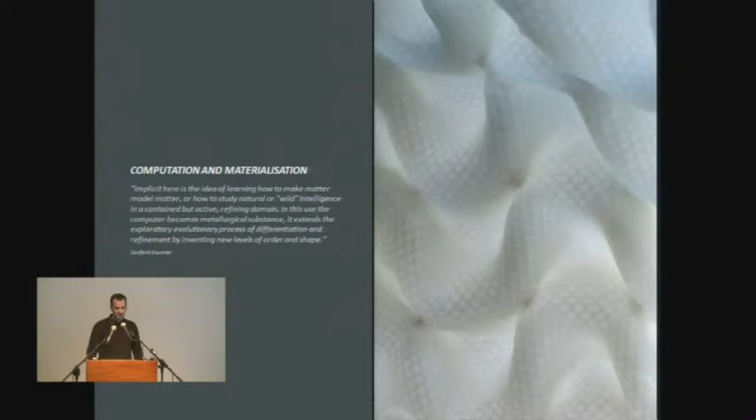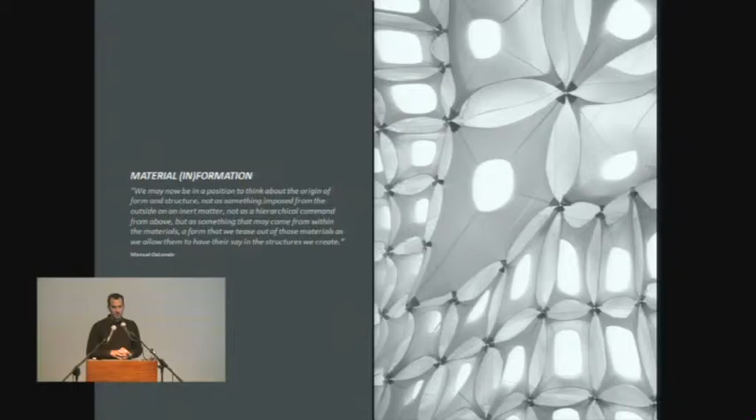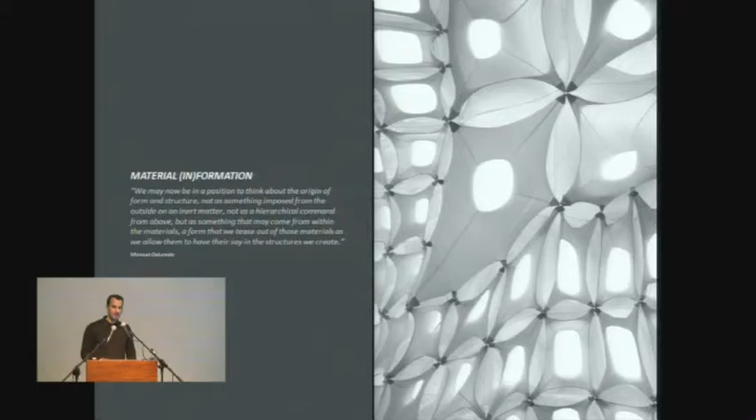Oh, sorry, just need to. They're not allowed to use those adapters anymore, so let's see which one are you. I already put it in. Done? Fantastic. Thank you. So ready.

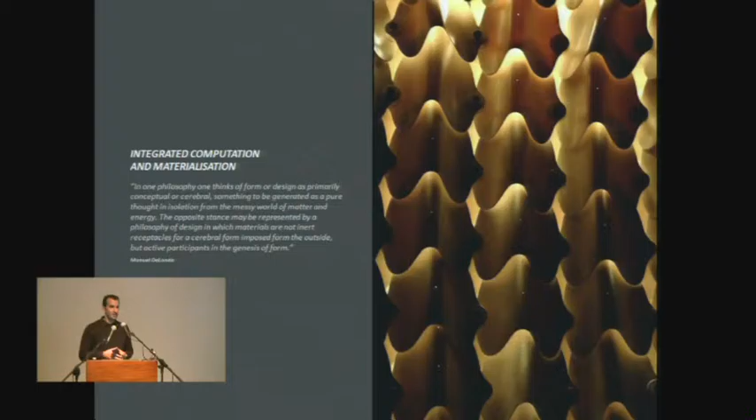And I think this is interesting because it opens up the possibility to no longer conceive of materials as passive receptors of a predetermined or pre-designed form, but rather as a generative participant in the design process. And this probably presents quite a radical departure from both, on the one hand, the tired modernist truth to materials, most infamously proclaimed by brick whisperer Louis Kahn, and the dismissal of materiality and materialization altogether, which is quite emblematic for the previous generation of digital architects.

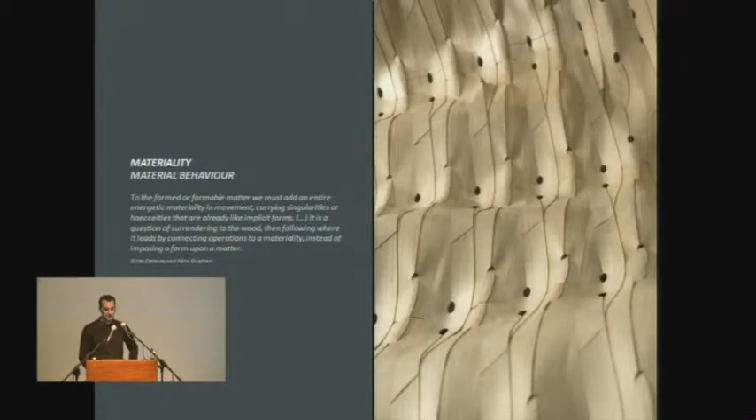So instead of that, our approach finds its conceptual roots in the processes of becoming in nature, which we call morphogenesis. So natural morphogenesis, as you probably all know, is the process of ontogenetic growth and evolutionary development that derives the complex organization, structure, and shape of natural systems from the interaction of, on the one hand, system-intrinsic material capacities, and on the other hand, the external influences, forces, and energies of the environment.

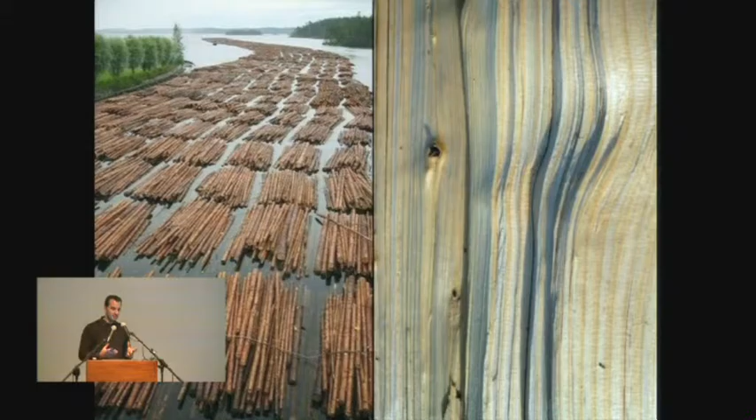And this leads to quite a profound difference between the fundamental characteristics of biological systems and the established logics of technology as they still very much pertain to architecture. So instead of an assembly of monofunctional, highly optimized individual parts made from a vast range of different materials, as in technology and architecture, biological systems really consist of very few components that are made from only a very small number of basic materials that achieve their outstanding functional integration, performative capacity, and material effectiveness through morphological differentiation, which is the summary process of each element's response and adaptation to its specific environment.

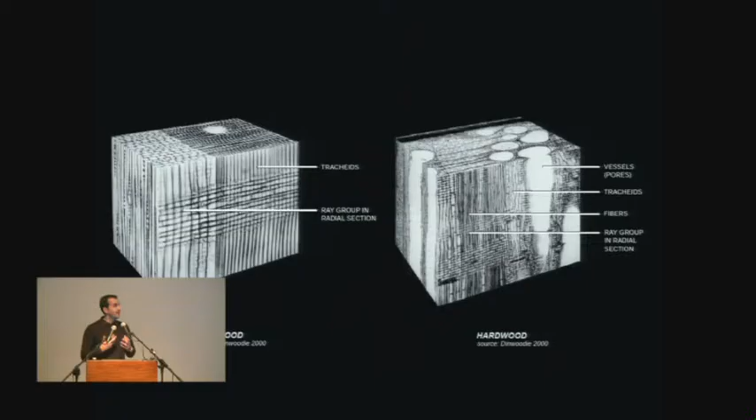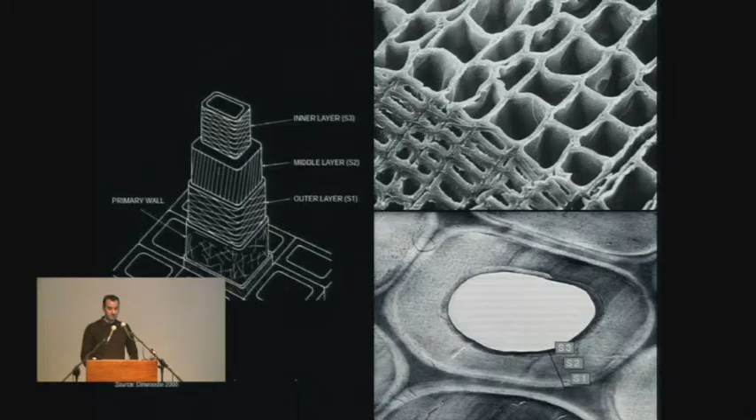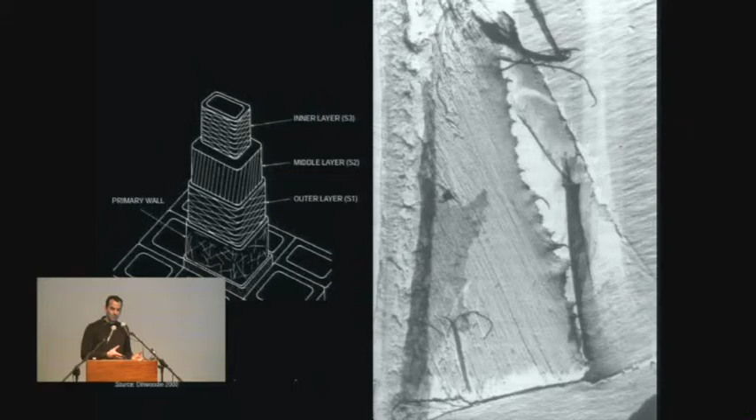Another really striking characteristic of natural morphogenesis is that obviously formation and materialization is always inherently and absolutely inseparably related. And this is quite in stark contrast to the usual way of thinking about architecture design, which is still characterized by a one-directional and hierarchical relationship that prioritizes the definition of form, structure, and space over its materialization. So I think one could argue that since the Renaissance, the rising separation between the processes of design and making have led to a conception of materialization as something that is more facilitative rather than generative in character, and of materiality, as previously mentioned, as a mere passive property of shape. And this is still very much the case today, maybe particularly since the advent of digital design.

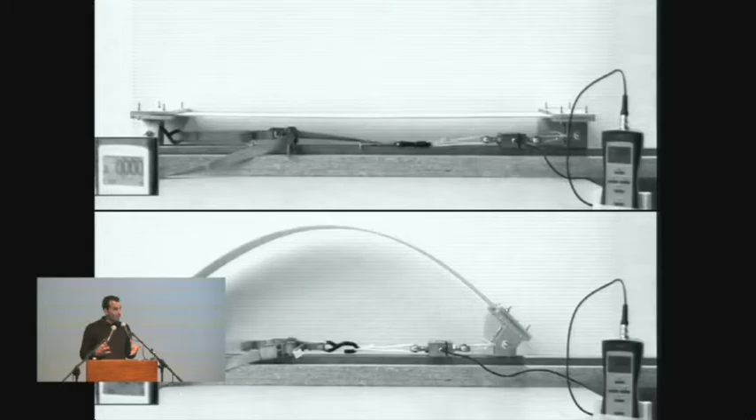So over the last 10 years, our research has focused on the development of a quite different, more integrative approach to design computation and digital fabrication, based on a multidisciplinary approach that entails working together with structural engineers, computer scientists, material scientists, and a lot with biologists. And it's really an approach where computation and materialization are conceptualized as something that is inherently and inseparably related. So as mentioned, what I will do in this presentation is go through 4 research areas that we are investigating, and rather than showing that on an abstract theoretical level, I will back this up with 4 related projects. So looking at materiality, materialization, material structure, and ultimately material performance.

So the first chapter really focuses on materiality and investigates how new technologies enable the integration of material behavior in the design process, and thus allow for this kind of understanding of material, not so much as something that is just there to receive a predetermined shape, but rather something that can become a generator in the design process.

I think it's also interesting to see that this approach is not limited to exotic building materials or expensive manufacturing processes, but that it can actually be employed in a context of very low resources, and it can even unfold new possibilities from very common materials, as is the case with wood, which is arguably one of the oldest construction materials we have.

But unfortunately, due to the demands of standardization that are superimposed on practice, it has really been dumbed down to mainly a dimensional construction element, which is probably most emblematic in the US, where you don't call it a piece of wood anymore, you just call it 2x2, 2x4, disregarding the fascinating internal cellular structure of wood, which actually is the driver for its behavioral characteristics.

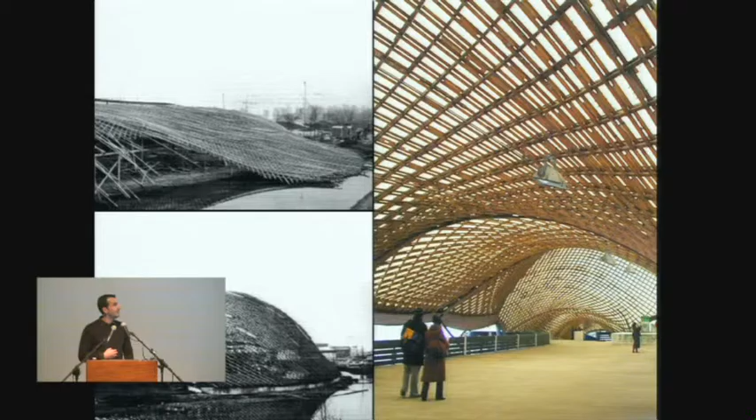So all our projects that look at this kind of integration of design computation and materialization really begin on the microscopic level, where we investigate the particularities of the material. And it's very interesting to see that on this level, wood can actually be described as a natural fiber composite material, where the cellulosic microfibrils function like fibers that are reinforced in a matrix of lignin and hemicellulose.

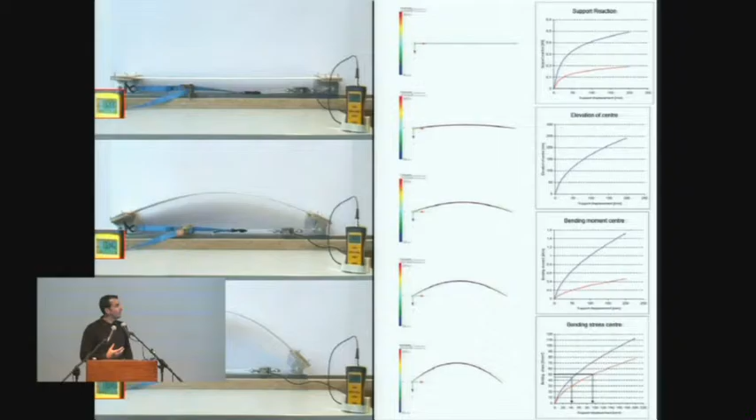And what is also interesting is that in this way, wood actually shares quite a lot of characteristics with what we know as synthetic composite materials, such as glass fiber, which are characterized by high strain at failure, which means they have relatively low stiffness combined with high structural capacity. And this is interesting because these material characteristics are well suited for construction techniques that employ the elasticity of wood to physically compute more complex shape.

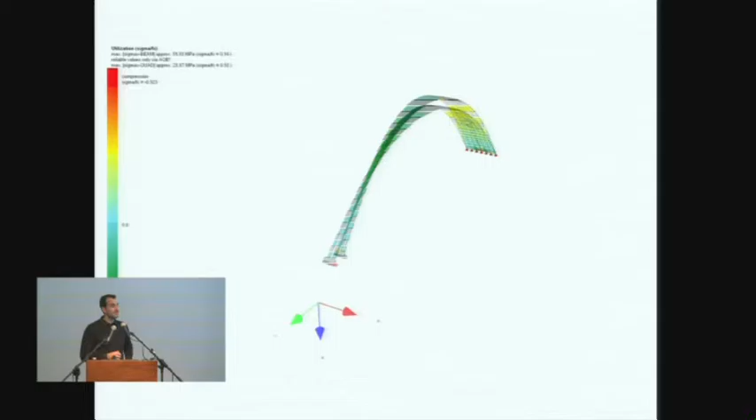And this was investigated in the first project I will show a little bit more in detail, which was a collaborative project of researchers and students from our institute and the Institute for Building Structures and Structural Design, run by Professor Knippers, who is a structural engineer. So this is also an example of how such a collaboration can work.

All the projects that I will show are typically one-year projects, so all the research, fabrication, execution and construction happens within the time frame of one year, and it's a collaborative effort between teaching and research, usually bringing together 5 or 6 PhD researchers and 10 to 15 graduate students.

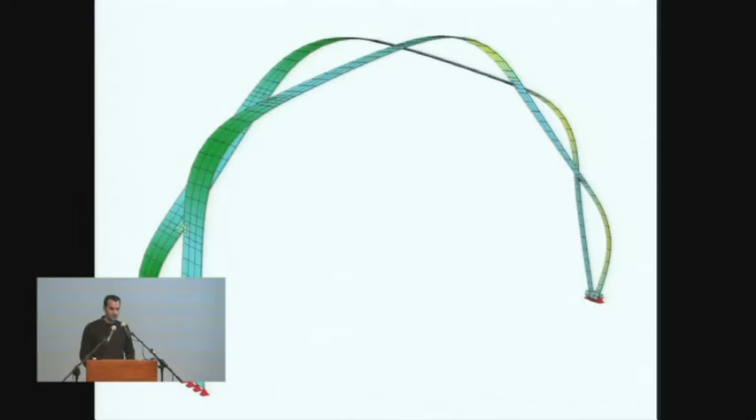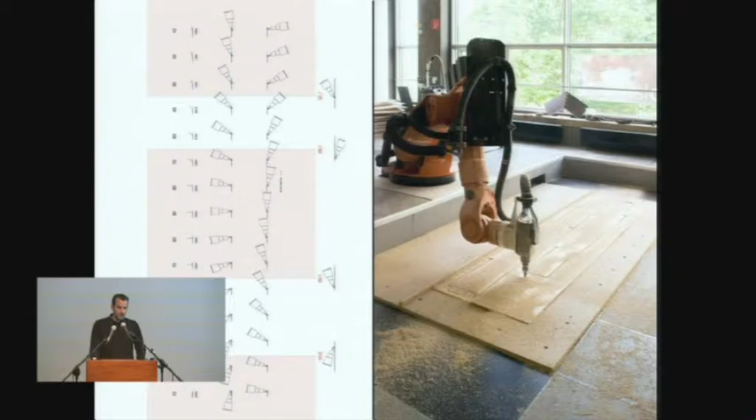So at the core of that project is really the awareness that any material has the ability to compute form. And a very good example of that, which you can see here, is the specific figure that a strip of plywood finds once you expose it to a very simple input. If you pull on the one support point, which is really just a linear translation based on a given force, you actually get the relatively complex Elastica curve for free. What's also interesting is that this so-called Elastica curve overlaps in certain geometric regions quite closely with the catenary curve.

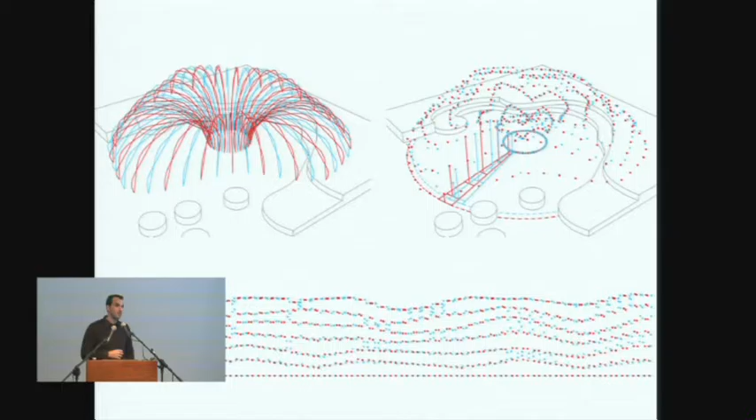Despite the fact that this is an interesting material behavior and allows you to actually shape simple pieces into complex geometry and that they can have a structural advantage, this behavior is hardly ever used in architectural design. And this is because architects can simply not draw or model such material behaviors, and that means that they can usually not design with it. You cannot draw an Elastica curve and then expect the material to do that. You have to have different techniques.

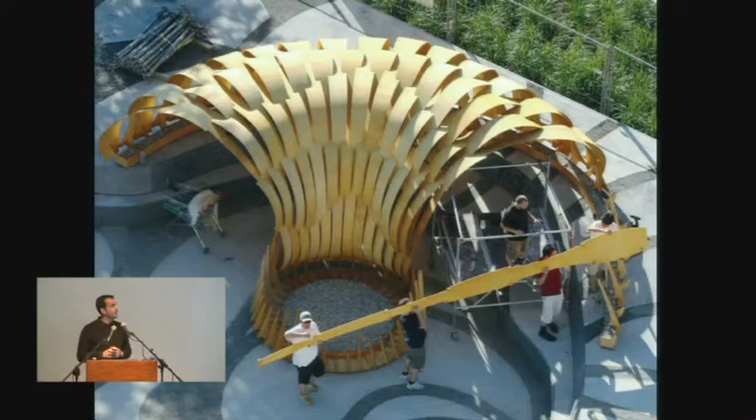So it doesn't come as a surprise that there are only very few examples of such elastically bent architectures, as for example the vernacular architectures of the Madan people in southern Iraq that construct their houses from elastically bent reed bundles, taking advantage of the pre-stress in the elastic bending process to stabilize the houses. Or, for example, the timber grid shells that were developed by Frei Otto in the 1970s at his institute in Stuttgart, that are initially assembled as entirely planar, regular wooden lattices.

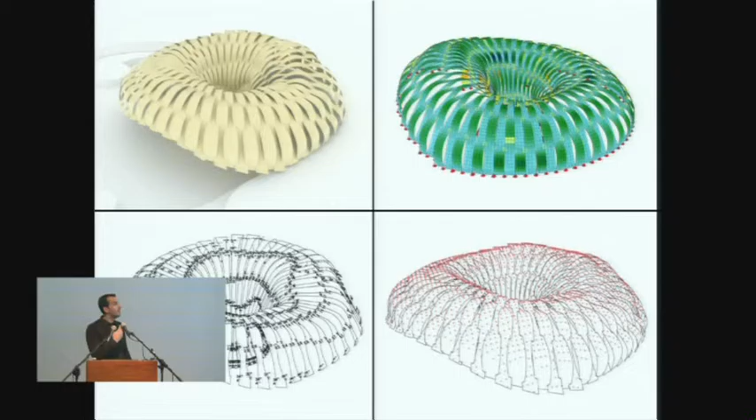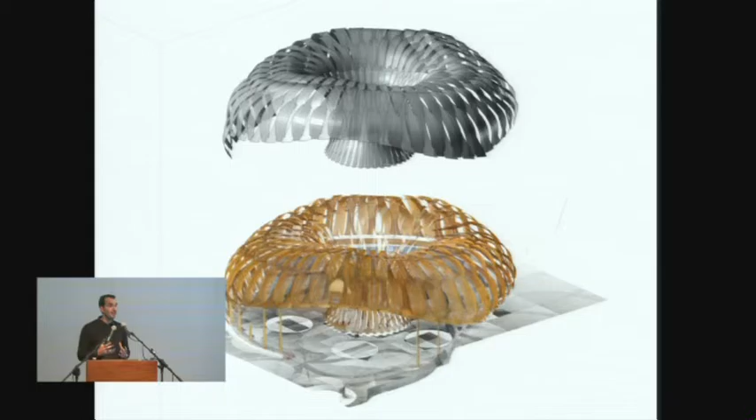This kind of calibration, creating an interface between the physical and the computational, allowed us to define a basic material system consisting of planar strips. As you can see in this simulation, it's a simple system where two strips are initially formed by a global bending induced by the translation of the support point, then connected at differential distances so that a tensile strip region holds the other elastically bent region in shape.

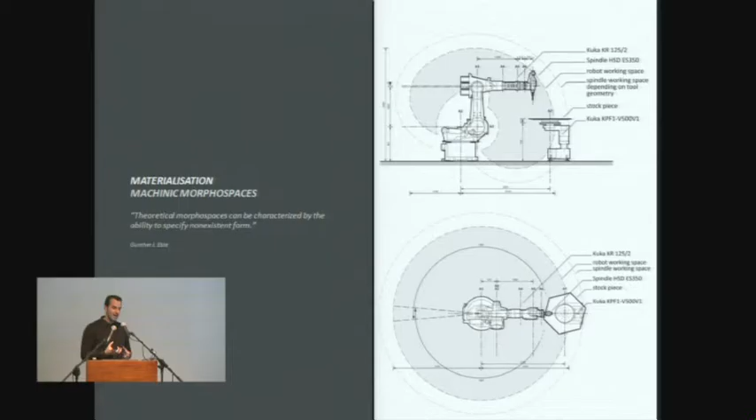So along the length of the strip, tensile and elastically bent regions alternate and keep each other in equilibrium. This is what we call a behavioral system, which then needs to be transferred into a construction system, done here in a fully computational manner, exploiting the possibilities of the machine to be used. In this case, the ambition was to do the entire project with one machine and one tool only.

It's not difficult to detect that there's one critical detail in this construction, a detail that most structural engineers would initially say is not working. This is the joint point of the two strips, where the structural depth is reduced to almost zero, which obviously induces a severe weak point in the structure.

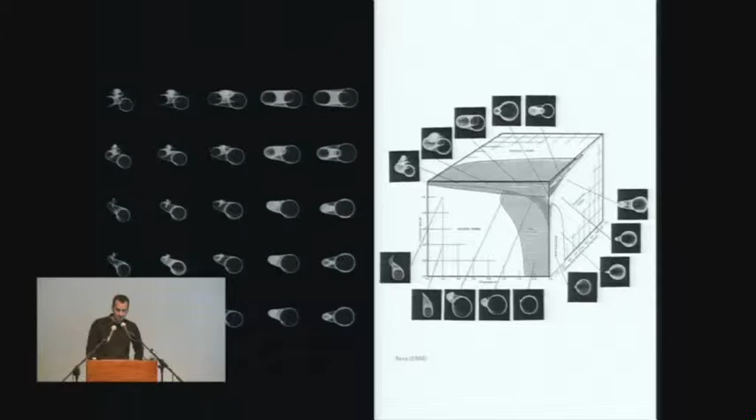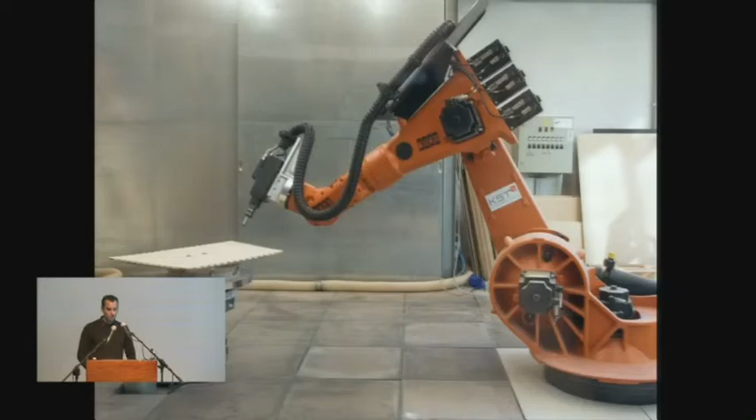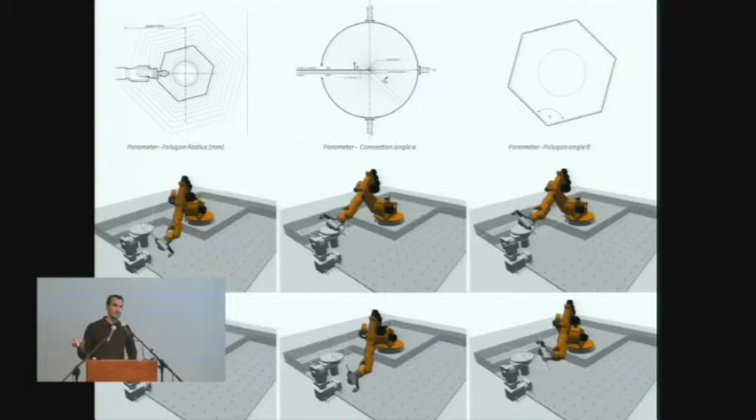Of course, this structurally required irregularity results in more than 500 geometrically different parts, which isn't a big deal when you can use digital manufacturing processes with a relatively streamlined connection between the design model and the fabrication. What's probably more interesting, and I think quite fascinating, is that the substantial intellectual investment in developing the design, design computation, and simulation processes results in a surprisingly simple and cheap system.

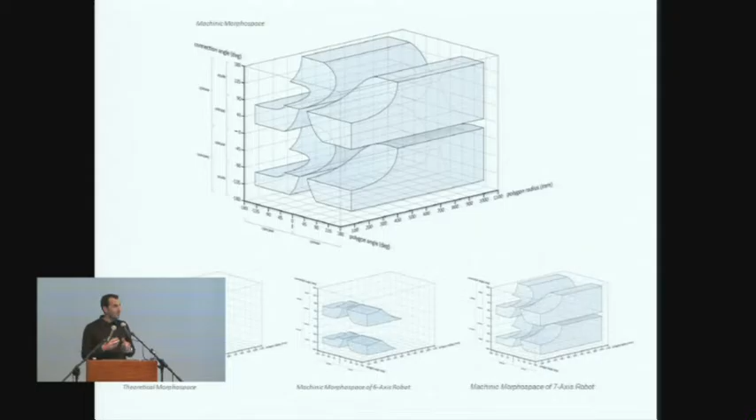Here, these planar strips just need to be connected at the joint points, and then they find the shape they need to take completely by themselves. So in other words, even in full scale on site, the material itself computes the shape of the pavilion.

This equilibrium state of the final pavilion unfolds, on one hand, quite a unique architectural space with a very specific architectural performativity, but at the same time it's also very efficient with the employed material resources and has a high level of structural performance. In fact, the entire structure, with a diameter of more than 12 meters, could be constructed using just very thin, 6.5 millimeter — about a quarter inch — birch plywood pieces.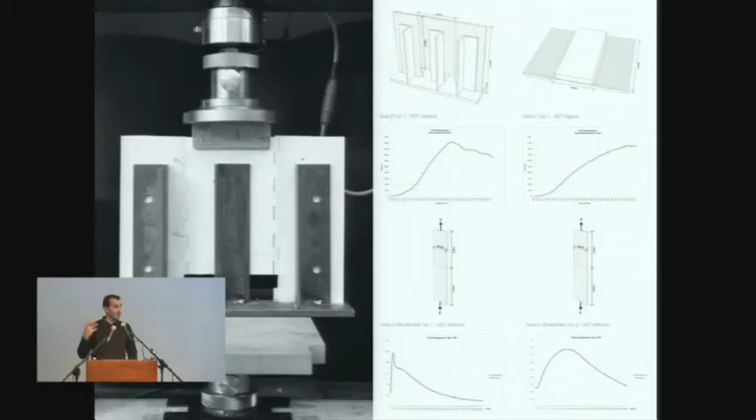This super thin skin is at the same time the load-bearing structure, which in all these cases also has to fulfill the quite stringent requirements of a German building application we have to get for all these prototypes, both in regards to wind loads and snow loads. But this skin is also the light-modulating and weather-protecting envelope, which in this case touches the ground only on one half of the toroidal shape and then forms an 8-meter free-spanning opening on the other side.

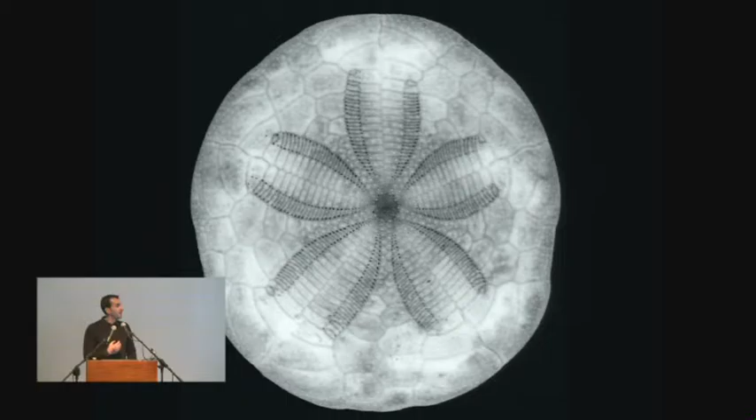What's also interesting is that inside this toroidal space can never be perceived in its entirety, which leads to a surprising spatial depth that is further enhanced by the sequence of direct and indirect illumination resulting from these undulations of the envelope.

In addition to using these projects as a kind of architectural exploration, we also use them as a means of investigating and verifying our design methods.

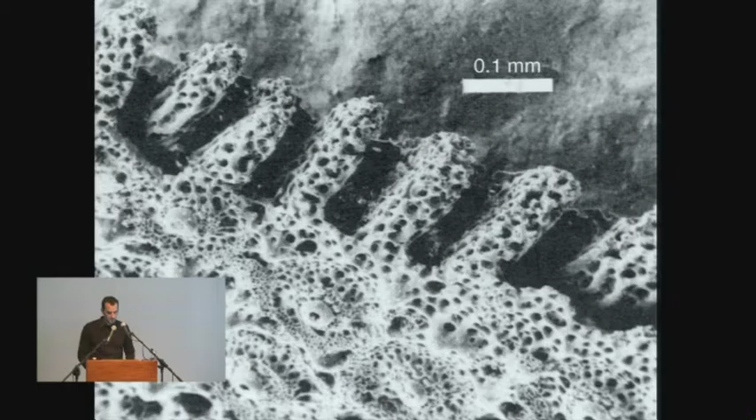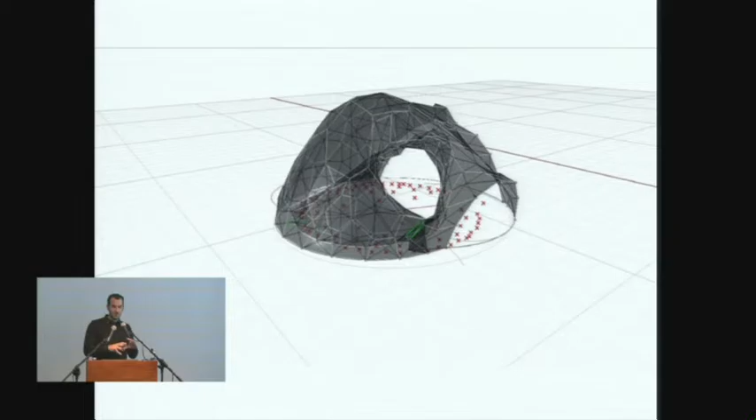And then the fabrication model, and most importantly, on the bottom right, a scan of the actual pavilion, which was done a couple of times, and then the resultant point clouds were algorithmically evaluated by overlaying the critical joint points of the scan with the actual location of the joint points as planned in the digital model.

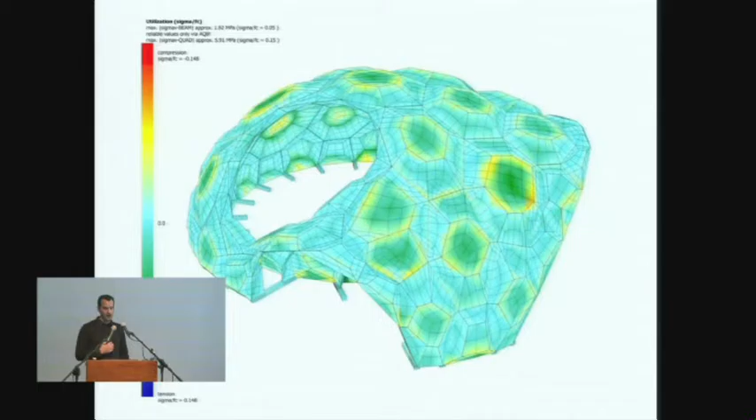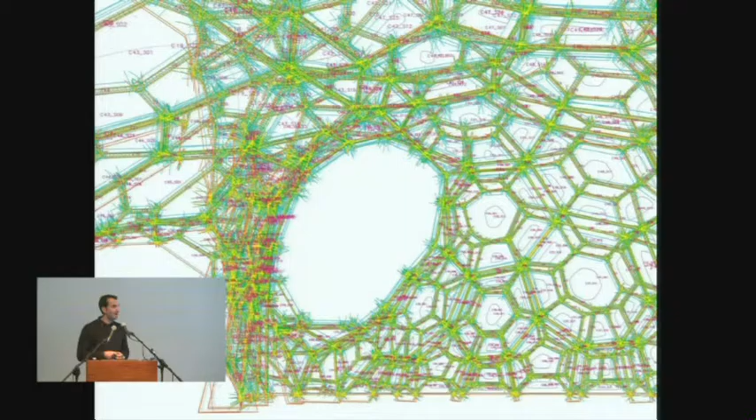So probably more importantly, I think the project also demonstrates how focusing the computation design process on material behavior rather than geometric shape allows for unfolding performative capacity and material resourcefulness, while at the same time expanding the design space towards formerly unexplored architectural possibilities. I think here one can really say that the material is no longer a passive receptor of a design shape, but really an active generator of the design.

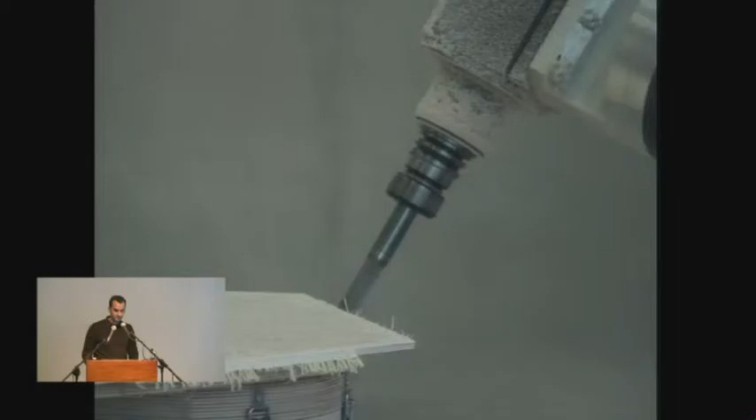In addition to these investigations of how one can actively employ material behavior in the design process, we also investigate how we can use digital fabrication not so much as a means of facilitating a preconceived design idea, but rather also to become a driver in the design process. For that, it's very important that one can find a way of capturing the actual capacities, or let's say possibilities, of these machines in a rigorous and systematic fashion.

And for that, we have investigated a possible transfer of the mathematical concept of so-called morphospaces from theoretical morphology in biology to computation design and fabrication.

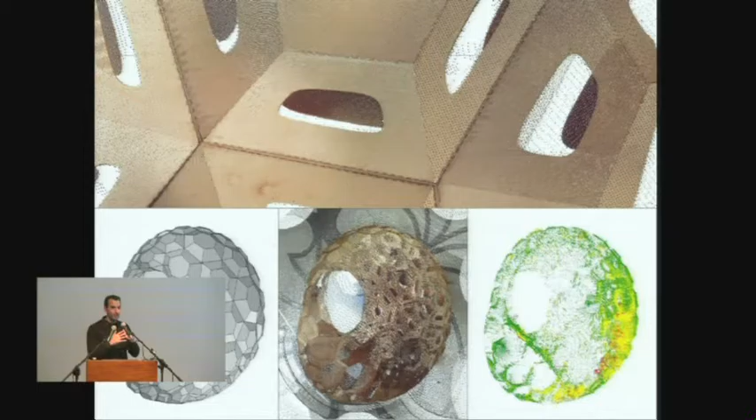But then the seminal moment is when he goes on and maps these parameters into a three-dimensional coordinate system in which each axis represents one of the shape parameters. This space that he opens up is the theoretical morphospace that all shell morphologies could take. And then he went on and mapped into this theoretically possible geometry space the actual shell morphologies as they exist in nature.

By that, he made the critical distinction between what is theoretically possible and what physically exists in nature, basically differentiating between the theoretical morphospace and what is called the empirical morphospace. So this was 1960s state of research in biology.

By now, theoretical morphology has moved on and uses n-dimensional models capable of mathematically describing a not-yet-existent form. So in the next project, which was again a collaborative undertaking of researchers and students from my institute, the Institute of Jan Knippers, and also other partners from the University of Tübingen, part of our competence network biomimetics, we investigated how we can transfer this idea of morphospaces from theoretical morphology to digital fabrication.

This project started with a basic investigation into how we can extend or use a production robot to expand the possibilities of traditional wood jointing techniques. In this case, finger joints, using a 7-axis setup that allows you to create more complex plate morphologies joined at various angles, while still maintaining the key advantage of the traditional finger joint—no additional mechanical fasteners or adhesives required for structural capability.

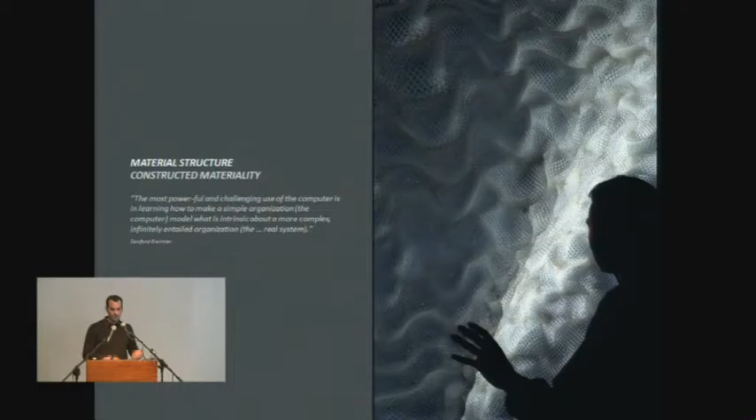This brings us to the quote from Julian Vincent, who stated that in biology, material is expensive but shape is cheap. As of today, the opposite was true for technology. Arguably, with these robotic fabrication technologies at hand, and knowing quite specifically how to navigate this space, you can change this paradigm and seek new performance capacities through adaptation of shape rather than adding surplus material.

For that, you have to understand the specific behavior of these plate morphologies. You don't need to be a professor in structural engineering to understand that these finger joints are very good at withstanding shear forces along the edges of the plates, but weak in withstanding bending forces, and have no capacity to withstand tensile forces. This poses a challenge if you want to construct a larger plate morphology or structure at a construction scale.

It's interesting to note that natural systems have evolved solutions to exactly this challenge—for example, the plate skeleton of the sand dollar, which consists of discrete polygonal plates jointed together by the biological equivalent of a finger joint. The sand dollar has evolved plate morphologies capable of capitalizing on this joint's capacity by transferring all forces acting on them—and they're quite enormous since they live on the shore face—into shear forces along the edges.

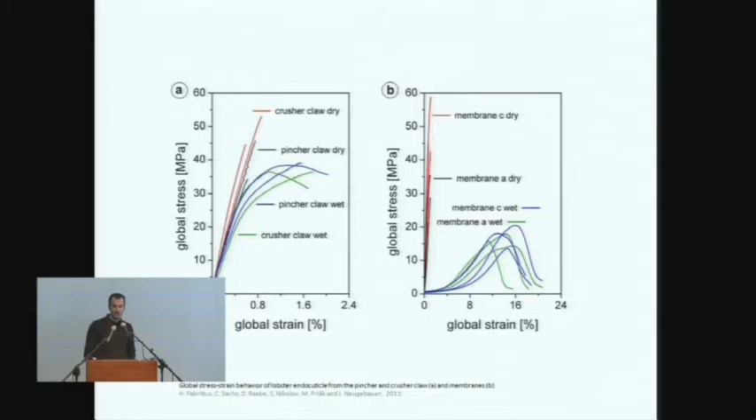So we investigated these sand dollars with the help of biologists, experts in biomechanics from the University of Tübingen. With them, we identified 8 relevant biomimetic design principles that govern this performance capacity, and captured them in algorithmic design rules embedded in a computational process. This enables the designer to explore the machinic morphospace of what is physically producible, while also capturing these biomimetic rules and still leaving enough design freedom to make a highly specific structure in regards to its context.

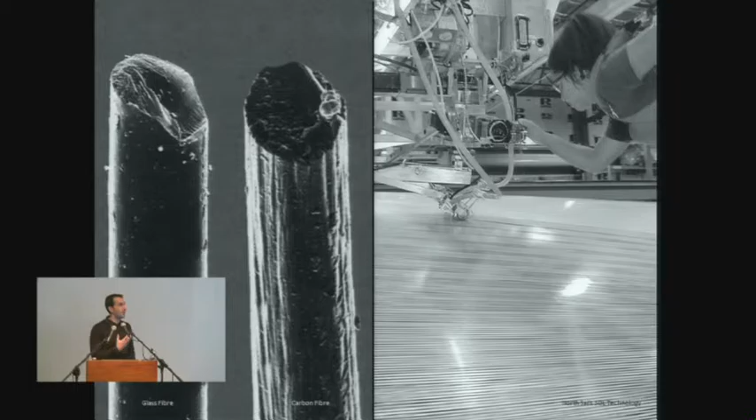The resultant morphological differentiation leads to high structural performance and a quite distinctive architectural appearance. But in return, it also requires the fabrication of a vast number of different plates—in this case, more than 850 plates with more than 100,000 different finger joints.

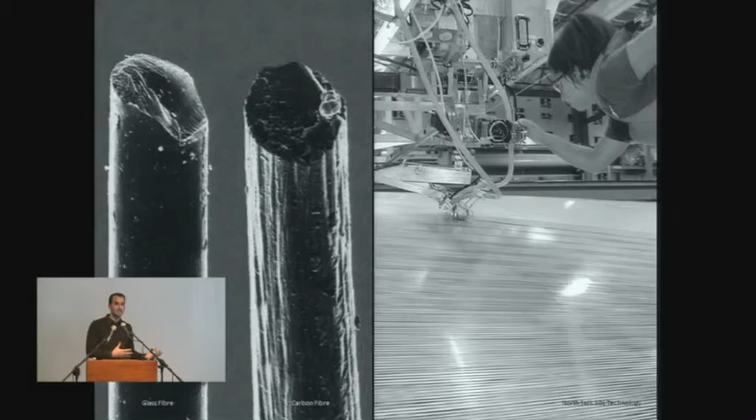So the plate is actually mounted onto a turntable that's also robotically controlled. And then it's actually trimmed, which has been done before the video started. And now the robot adds a miter at the edges, and then it cuts the joint in one go, for which we had a special tool developed by one of the industry partners, which is able to cut at the tip and the flange, which is quite unusual, which then means that the precision of the joint is actually the precision of the tool, which is in the tenths of a millimeter range.

It takes about 3 minutes to produce one of these plates. And what is interesting again is that while the design process is quite involving and a substantial intellectual investment, the resulting system is incredibly simple. It's basically a big puzzle that is self-correcting when it's assembled. It really does only fit in one quite precise shape.

Actually so precise that we did some unorthodox exercise when assembling it; this is the way you would never assemble a shell in construction. You'd always have scaffolds, then lay the segments on top, then do your tolerance compensation. If you do it like this and your last piece doesn't fit, there's no way of resolving this situation.

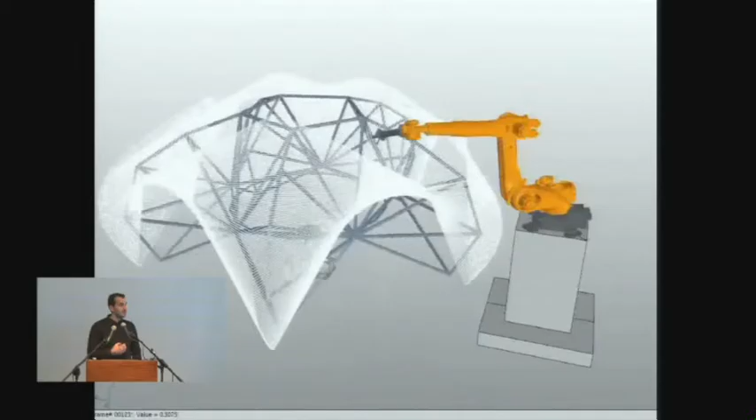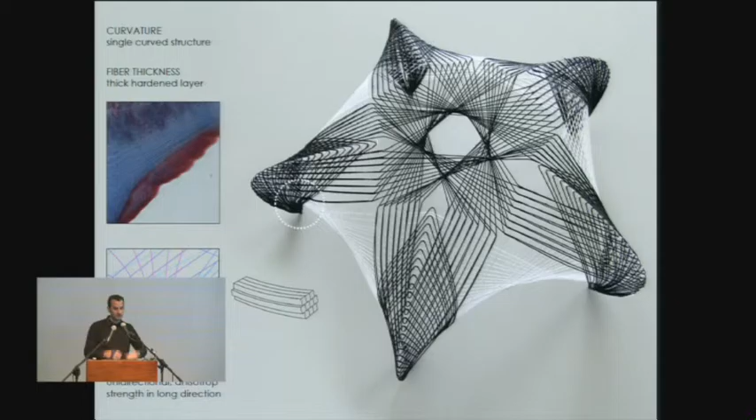More importantly, I think the resultant lightweight modular wood shell again demonstrates both the structural capacity and the architectural potential of such a system that exclusively consists of extremely thin birch plywood plates that are only connected by these robotically fabricated finger joints.

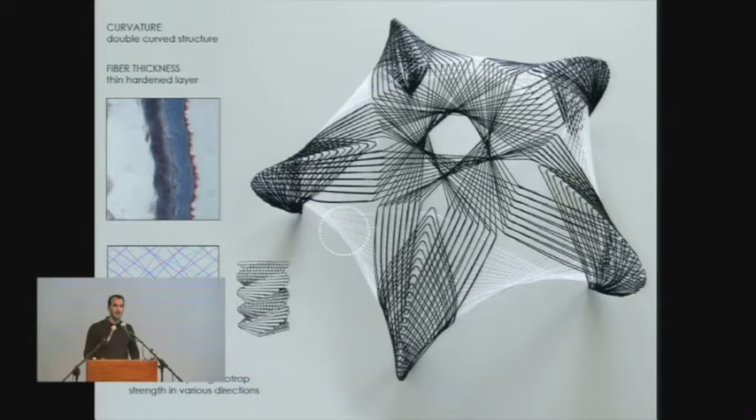And as the structural performance here results from each element's highly specific response, the entire pavilion with a diameter of more than 12 meters and a height of more than 6 meters could be built using only extremely thin plates. So in fact, all of the plates in this pavilion have only a thickness of 6.5 millimeters, which results in a very lightweight and materially efficient structure that manages to enclose 200 cubic meters of space with less than 2 cubic meters of wood.

So basically, you could build the entire thing with a stack of wood on that table that would be only that high. So envision what 2 cubic meters of wood are. It's actually really very little.

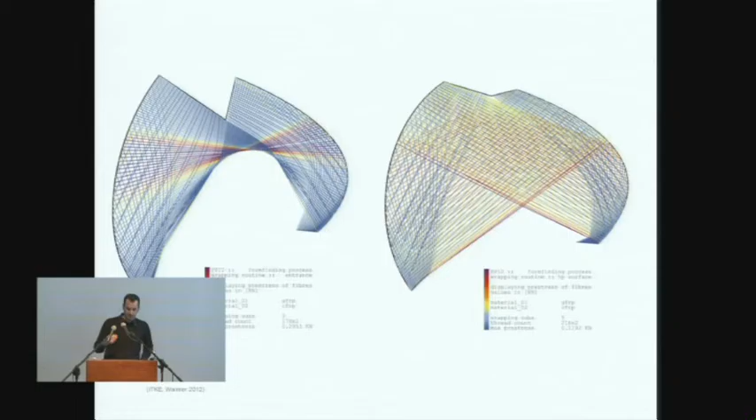So I think, in a way, this prototype shows how a tectonic richness and a structural capacity don't necessarily need to be in opposition to each other, which is a perception one could have by looking at a lot of contemporary architecture, but that you can actually fuse this possibility for architectural performativity and material performance in a material-oriented design process.

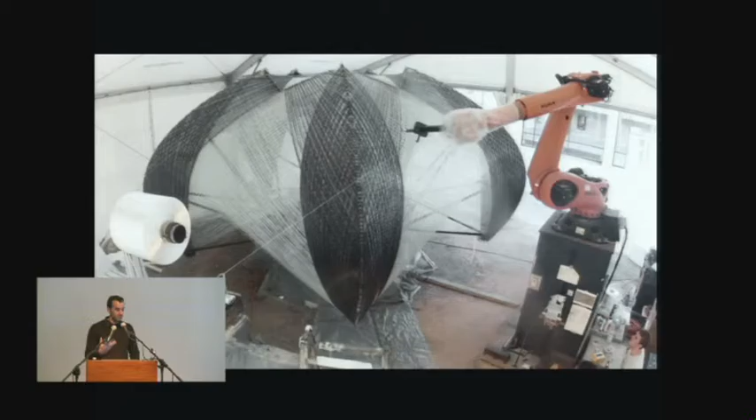So overall, I think the project quite nicely shows how embedding the logics of materialization in such a morphogenetic computational design process really also allows the designer to offset the conventional economics of construction. Here, as mentioned before, a substantial intellectual investment in the design process results in a very simple, cheap, and efficient system that still yields a lot of novel architectural possibilities.

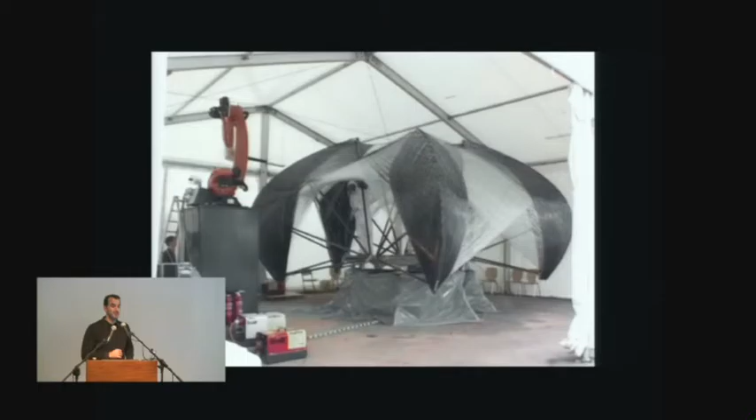What is interesting about this system is that it also captured the imagination of the Ministry of Forestry in Germany, and we actually got funding to build a much larger, permanent wooden shell as a result of this project, which will complete in April next year. I think it is interesting that these projects don't only allow architectural speculation, but they can also become instigators for actually permanent architecture.

It's also interesting to note that this morphology of the sand dollar with these discrete building parts is actually very rare in nature, and that you usually find exactly the opposite, which are structures that are very continuous and that are performative due to the local differentiation of one continuous material structure. So the third chapter focuses on that, how you can begin to think about material structure as something that cannot be so easily distinguished any longer, and with that you obviously shift towards a paradigm of composite construction.

So this is what we explored in the third project I would like to show you, which is really different to the previous pavilion or the previous project, which was a shell that was built up from discrete elements. In this project, we really aim for almost the opposite approach of an entirely continuous shell in which the material structure is constructed and differentiated in its continuity through robotic fabrication.

This is again a collaborative project between architects, structural engineers, biologists, and actually process engineers in this case. And it's interesting to note that there are a lot of biological examples that are like this, but we chose the American lobster because there's a lot of biological research on this one. So the exoskeleton of this lobster, which at first glance appears relatively monolithic, reveals under the microscope a high level of differentiation of the structure, which is organized across several levels of hierarchy.

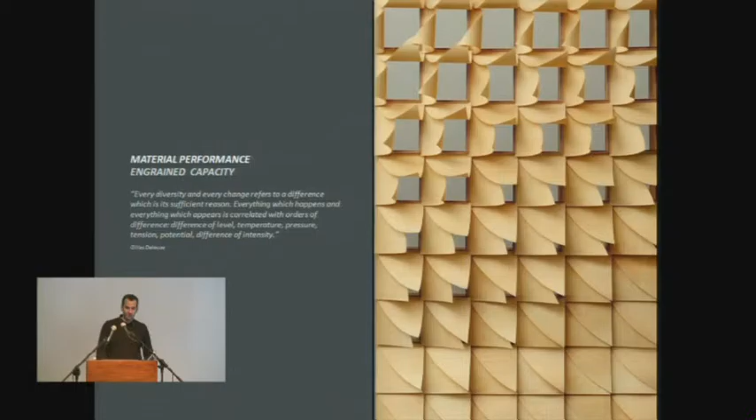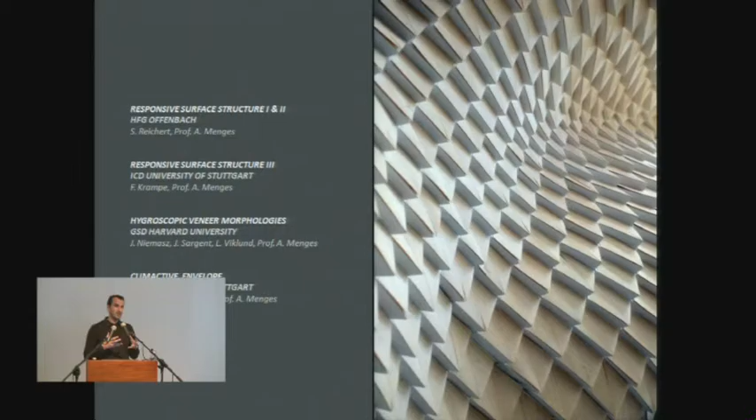And because these natural fiber composite materials are conceptually quite close to synthetic composite materials, we at the same time investigated new or advanced ways of working with, for example, glass fiber or carbon fiber composite materials. As for example, the 3DL technology, which is not that new anymore, I think it's 10 or 12 years old, where high performance sails for America's Cup yachts are actually produced in a way that the fibers or the filaments are laid according to the force flow, and these kind of fiber layup processes allow you to orient every single fiber in a direction in which it will ultimately receive the maximum stress.

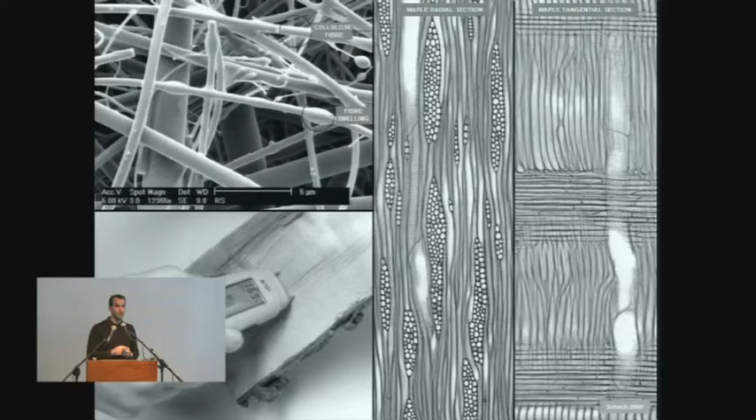Obviously, it also becomes clear that this is not a viable construction technology for architecture, because all these fiber layup systems require a comprehensive mold, which means that if you want to build something, you first have to build the building as a mold, and then you lay the fibers on top. So what we did is we tried to investigate possibilities of reducing the molds to a minimum linear scaffold on which an initial fiber layer is laid, which becomes the lost or embedded mold for the actual structural carbon fiber.

So here you can see this robotic process, which is a kind of 1 to 5 scale prototype, where the glass fiber surfaces are laid initially, and then they turn into the scaffold which ultimately receives the carbon fibers. So having established the basic robot programming logics, which in this case is not trivial because you don't program a machine path according to the geometry that the building element has, but according to a path that the tool needs to take in order to pre-stress the fibers in the right way. It's conceptually very different to the milling process that we showed before.

But once you have mastered this kind of robotic filament winding process, you can begin to investigate what different material behaviors you can actually yield from this process. So we did a lot of samples and evaluated them in collaboration with the structural engineers at the ITKE. And based on these different properties or material characteristics that you can get, and the logic and constraints of the fabrication process,

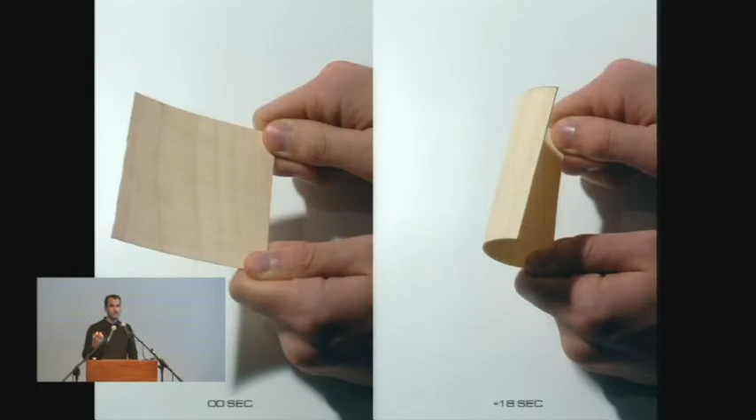So obviously, here design is very much related to the fabrication process. So we developed a kind of design syntax that allows one to explore the possibilities of this fabrication process, which is not trivial in this case, because the final geometry is something that only gradually emerges in the production process, because you have a lot of fiber-fiber interactions. So you lay your first fiber surface, and then the next fiber surface changes the geometry of that. And this happens until the last fiber is laid, which means that you have to simulate the fiber layup process for the entire fabrication.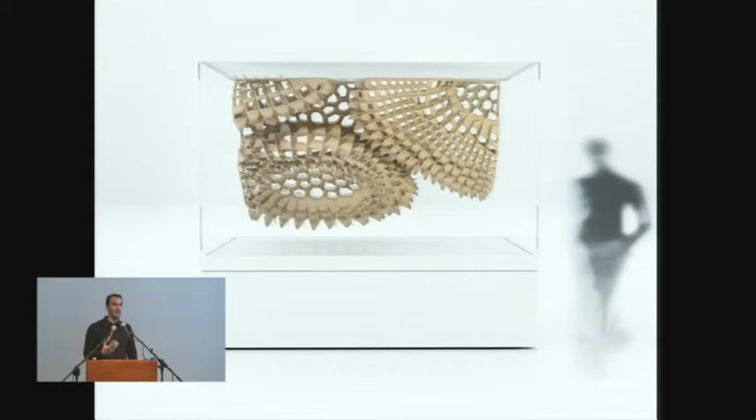So the final pavilion consists of more than 45 miles of robotically laid carbon and glass fiber, but it's only approximately 4 millimeters thin at its thickest part. So it is extremely lightweight and enables quite an amazing level of transparency and intricacy of the resulting surfaces, particularly when you see it from the inside.

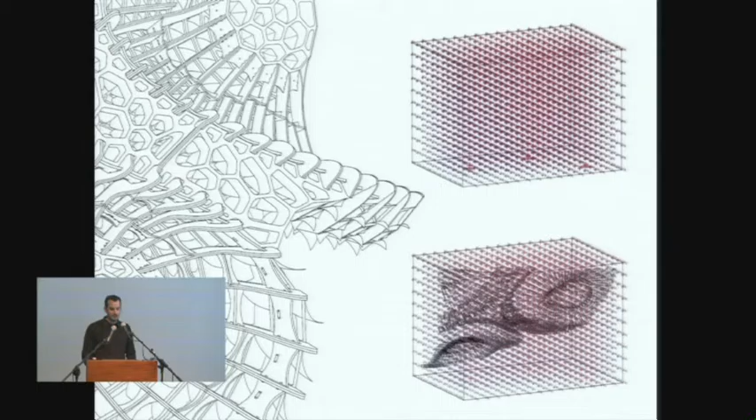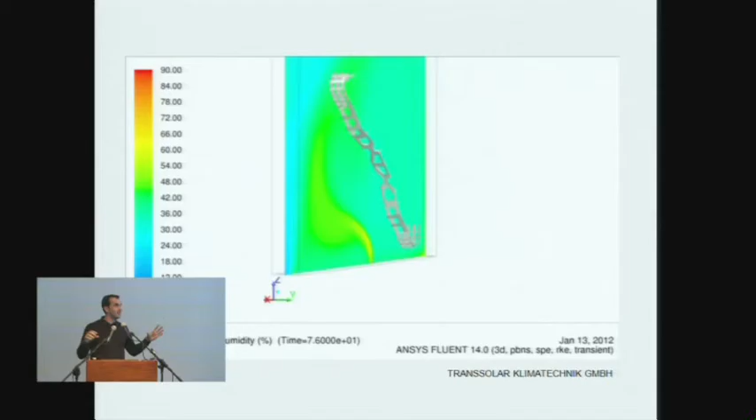So in a way, synthesizing the capability of the machine with building up the structure itself, the transparent glass fiber surfaces and the black carbon fiber rovings really allow perceiving the logic of the differentiated fiber organization within this translucent envelope, all forming one continuously constructed materiality. There's not a single additional element here. No nuts, no bolts, no nothing. It's just glass and carbon fiber rovings.

So I think, again, here the construction logic establishes both a super thin, highly performative skin and quite a novel repertoire for architectural tectonics, which in many ways allows to overcome the exuberance that is so emblematic for many digital designs. Here, the synthesis of novel modes of computational design, robotic fabrication, and also structural simulation enables the exploration of a new repertoire of architectural possibilities while still being very, very efficient with the employed material resources.

Currently, we're working on the next carbon fiber project, which is not completed yet, which actually takes this concept further by looking at a modular system that one can also wind with 2 robots without any scaffold in between. That's what I'm going to show next year, I guess.

So the final chapter is about material performance, which is if you enter into the domain of beginning to construct your own materials, with the distinction between structure and material beginning to blur, you also can begin to explore novel capacities that are embedded even in very straightforward and mundane materials. So I will return for one last time to wood because we have investigated in quite a number of projects over the last 7 years the possibility to understand wood as a climate responsive material.

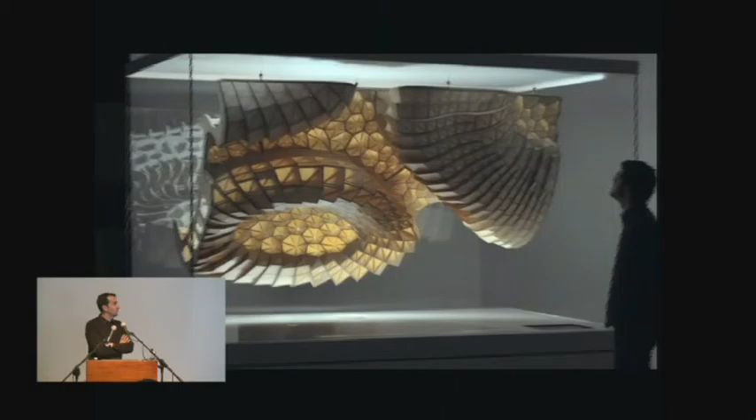And this is possible because, as you may know, wood is hygroscopic. So in addition to being a natural fibrous composite, which has a highly anisotropic behavior, which means it behaves very differently in the radial section or in the tangential section, it is also hygroscopic, which means that it absorbs and desorbs water molecules from the atmosphere, and by that it changes its dimension. This phenomenon is usually called the dimensional instability of wood, which is perceived as a disadvantage or deficiency of the material.

And in fact, we spend more than 70% of the energy in wood processing on trying to prevent or suppress this inherent behavior from happening. As you can see here, this is done by kiln drying, which means that you put the wood into a large kiln and you reduce the moisture content to something like 7 or 8%, and by that you try to stabilize the wood dimensionally.

And one could argue that we have almost 3,000 years of craftsmanship trying to work against this material behavior in order to keep your parquet floors from becoming wobbly or your wooden drawers from jamming. So what we try to do with these projects is exactly the opposite: explore this inherent climate responsiveness of wood as a possibility for rethinking a weather responsive architecture.

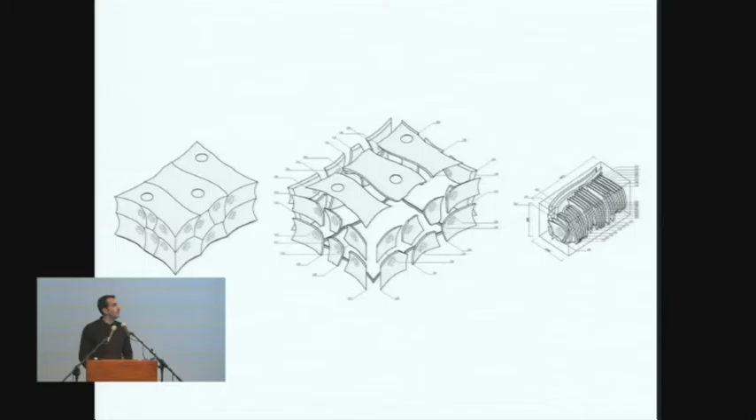And there are, again, natural examples of such lignin-based structures that behave like this, one that you probably know is the spruce cone, which grows on the tree in a moist state, and then it falls off the tree, and once the microclimate conditions reach a suitable level of low relative humidity, the cone opens completely by itself. It's also interesting to note that this opening process happens when the cone is already a dead plant organ, so it doesn't require any metabolic energy to work.

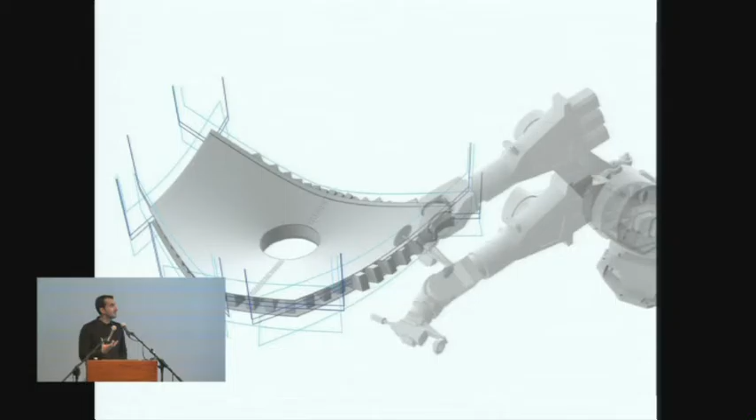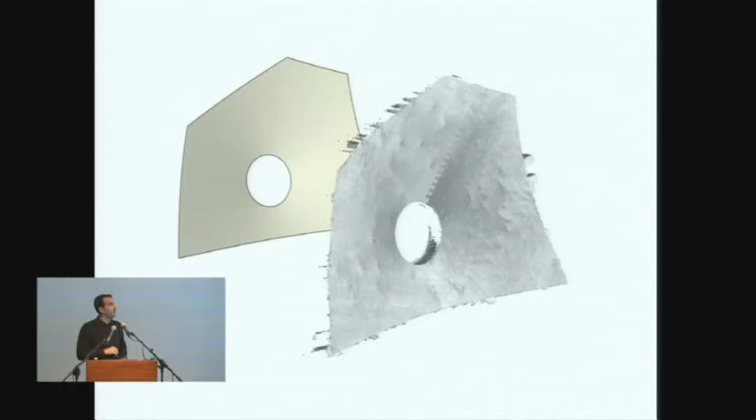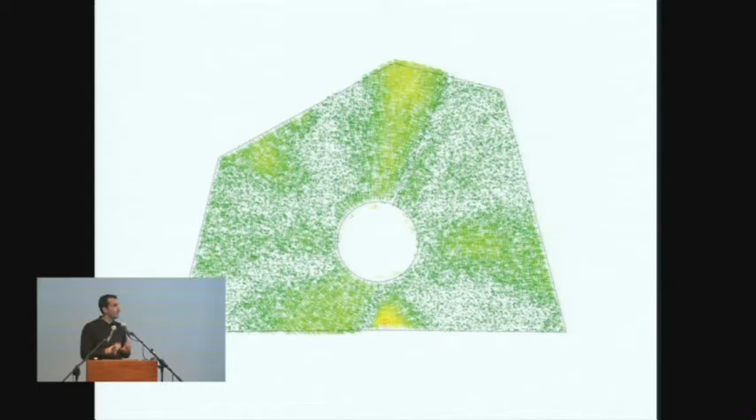So over the last couple of years, we have developed ways of how we can physically program that behavior. So although what you see here are two samples made from exactly the same material, the same structural makeup, and they respond to exactly the same humidity conditions, they behave in exactly the opposite manner. One closes with an increase in relative humidity and the other one opens. So due to this integral computational design and fabrication process, one can literally physically program this hygroscopic actuation behavior. And we have tested that in a number of full-scale prototypes.

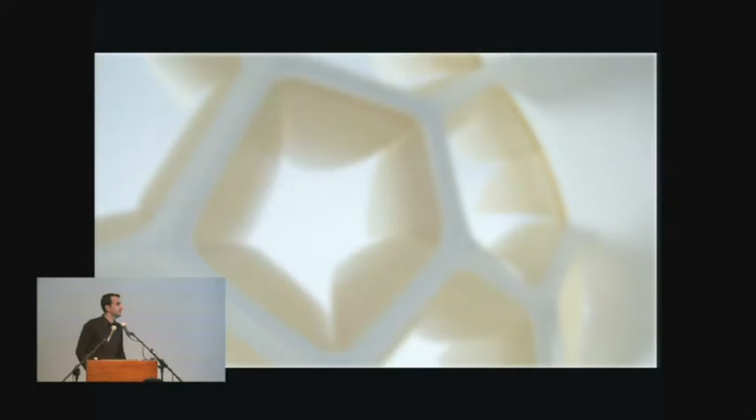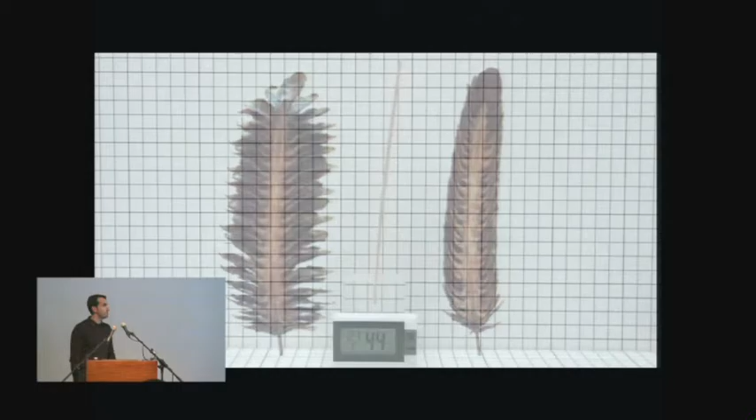So we thought it's interesting to insert into what is arguably one of the most controlled interiors in the world, always maintaining 50% relative humidity and 21 degrees Celsius temperature, a glass box in which we simulate the changes of the external climate of Paris, especially in regards to the humidity changes.

And in this way, the kind of material-sensitive morphology that we insert in this kind of glass box becomes a kind of visual device through which the visitor can actually perceive these relative humidity changes that form part of our everyday life, but are hardly ever consciously perceived. So here the actual geometry or morphology of the system is derived based on a simulation of the heterogeneous distribution of humidity within this controlled environment.

So you can nicely see in the simulation that our project partners Transsolar did for this installation that even within such a controlled environment as the glass box, the humidity levels are highly heterogeneous. And that becomes the driver for the sort of computation process that derives this particular geometry.